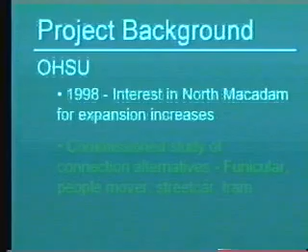They looked at a whole range of things, including funicular rail and people mover. Funicular rail, some of you may have seen in Pittsburgh, going up Mount Washington. It's essentially a rail that goes up an incline, different than a regular rail, but it keeps the rail car level as it goes up the incline and back down. We have one in Pittsburgh; it's the most common one people talk about, but it's essentially a rail that goes up a fairly steep incline. So rather than a streetcar running parallel to grade, this runs essentially level while going up an incline, like so.

People mover systems, there's a lot of different examples of those. If you think about those, it's like if you're at an airport, Atlanta Airport or some of these other ones, they're the things that look like subway cars, essentially. They look a lot like a subway. A lot of times they're cable-driven, a lot different than just a rail.

Streetcar was actually one of the options. It included, in the early stages, thinking about linking the streetcar not down to North Macadam, as we're currently thinking, but actually up to Marquam Hill, to OHSU, instead of back down that way.

And then the tram was one of the projects that was looked at, and their recommendation coming out of that was that the aerial tram was the connection that provided the best reliability and served their needs the best in terms of linking those two areas.

Growing out of that, they also began to think about how they wanted to develop on Marquam Hill, and how OHSU and the other institutions up there would develop on this very difficult piece of property. It's not the place that you would today start a medical institution of the type that we see up there, but that's where they are.

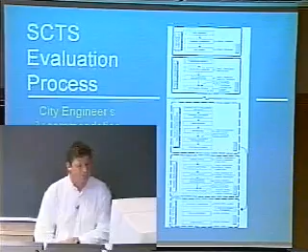Just to give a quick idea of the process, we put together a 5-stage process: first, process development; second, the alternatives analysis, which was that 2-month process we went through. Following that, additional steps including, if needed, evaluating any policy or regulatory conditions, then further design development - once we've decided how we're going to connect, what does that look like and how does it fit within the context of the community - and finally on to PE, preliminary engineering, final engineering, and construction. This process was intended to get the city engineer making a recommendation at these steps all along the way to city council.

We worked with Planning Commission in the early stages of this process, and the process included advice we got from the community, with Planning Commission responding to that advice. So the process was essentially something we took to city council that they approved.

What I'm going to walk you through today is primarily that second step of the process, looking at the various ways you could connect Marquam Hill to North Macadam. The ultimate action coming out of that went to City Council, and they have the ability to either approve, reject, or modify our recommendation in any way. That included a public hearing and a few public open houses along the way.

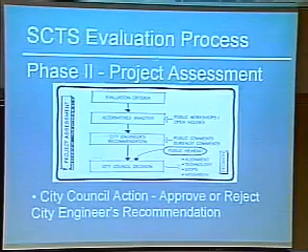A few assumptions we built into the study are pretty key. It's a little bit telling about the process that we had to highlight these assumptions, because I don't know that there had been a lot of community buy-in to these, but we had to make some assumptions heading in. First, that an OHSU presence in North Macadam is desired and appropriate - I don't necessarily think the community had fully embraced that idea yet when we started this process. Second, that their stated travel time needs of 10 to 15 minutes total trip - that's not just in vehicle, but walking out of my office into the next office on the other campus - that 10 to 15 minutes is acceptable, and anything beyond that is pretty much non-acceptable.

Another assumption is that all these systems would operate basically 18 hours a day, 7 days a week, and that the costs we used for comparative purposes - we had to pick a baseline, and we chose to use TriMet costs as that baseline, assuming this is like a public transit facility operated with public transit unions and those kinds of costs. It was all relative, not absolute - we were trying to just compare across these alternatives what the costs were, but that was an important assumption, one that was challenged pretty heartily as we went along.

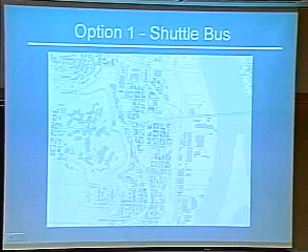I'll run you through the 6 options we discussed. The first option was a shuttle bus option. To orient you, the OHSU campus is here on the left, Terwilliger Parkway runs along through here, Sam Jackson Park Road up in here, and here's I-5. There were 4 different routes that we analyzed in this area.

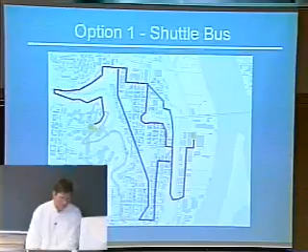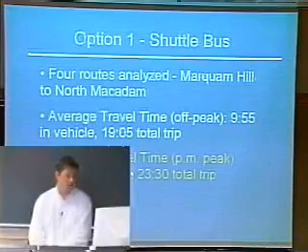We did travel times on each route, and what we found was that the average travel time in off-peak hours was around 10 minutes in the vehicle and about 20 minutes total trip. But it was susceptible to traffic, so during peak hours that time went up — on average 14 minutes in the vehicle, about 23 minutes total trip. So you can go back to those assumptions of 10 to 15 minutes.

This wasn't working really as a reliable thing. I actually did my own test times one night — they weren't included here. I had one trip from Marquam Hill down to North Macadam that took 40 minutes because there was congestion, something on the Ross Island Bridge. That kind of unreliability is really a problem.

So if any of the shuttle bus options included things like striping lanes for bus only or building a new bridge across I-5, issues like that to streamline the travel time?

It did — there were some capacity improvements that were considered, though we couldn't run those since they didn't exist. There are some improvements considered along there, for instance at 6th and Caruthers, adding another lane that we thought would be important. But the basic bottleneck is the Ross Island Bridge ramps and everything associated with that. To get around that you'd have to do something like an overcrossing, and that wasn't considered.

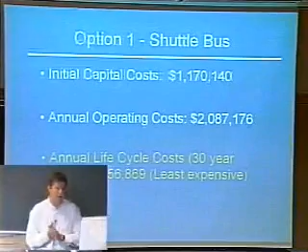We then compared a lot of the costs — I won't get into these too much. There were initial capital costs with buying the buses and operating costs. One of the things we did was try to anticipate a 30-year life cycle cost, which we thought was very important for a cost comparison taking both capital and operating costs into consideration. That became the basis for cost comparison throughout.

With a shuttle bus you have not only the operating costs of having 6 or 7 drivers on call for 18 hours a day, 7 days a week, but you're also continuing to buy new vehicles over time and maintaining those vehicles. All those things were factored into our life cycle costs.

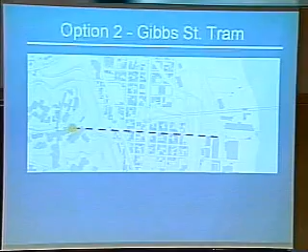At this point we start getting into the aerial alternatives, the remaining five options. Option 2, the Gibbs Street Tram, was the one originally proposed by OHSU. This is what we call a bi-cable aerial tram — I'll get into that in a second. It runs along the Gibbs Street alignment, just to the west of Barbur Boulevard, all the way down into North Macadam, on an existing city right-of-way. It goes over the Lair Hill neighborhood.

This is a historic district, the South Portland Historic District. A lot of you may have been down in here — a lot of older single-family homes in this district. You can tell by the map that it's been chewed up for years by transportation improvements. It's really been divorced in all directions from the rest of the city, so it's this real enclave down here.

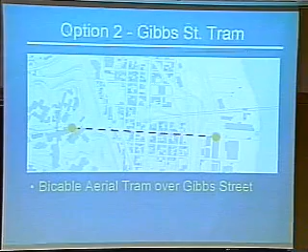So the Gibbs Street Tram essentially flies straight over that alignment. There would be one tower to the east of I-5 and Macadam Avenue in North Macadam. It would be about 185 feet tall.

Let me briefly describe. We looked at three different aerial systems. I'll describe the bi-cable tram here, shown in Germany. The bi-cable tram, essentially, you think about it almost as a railway in the air.

The two main cables that you see there are stationary cables, strung at very high tension between the upper terminal and the lower terminal. Because of that high tension, they can span very large distances, which is different than the gondola that I'll show you later.

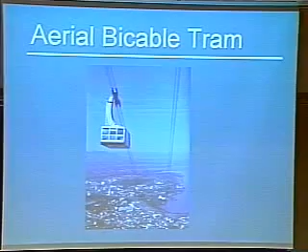Then there's a third cable that actually hauls the tram back and forth. There are two of these, running in reversible fashion past each other - as one is going up, the other's going down, and then they reverse. So they're very simple systems, really.

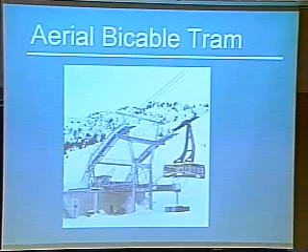It's an example of a lower platform. Because of the high tension, these systems can carry high loads - in some cases 150 passengers, with very large cars. In this case, we're recommending essentially an 80-person car, which we'd expect to be loaded to about 60 at capacity, but it's designed for an 80-person capacity.

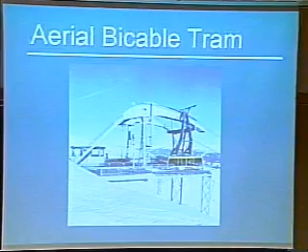Structurally, this is probably what would happen up at the OHSU campus, where instead of having a separate tower, the tram would essentially integrate into the upper landing. The tower and the landing platform would become one structure at the top.

And this is at Stone Mountain, Georgia, just showing a different type of treatment. We looked at a number of different things in the neighborhood.

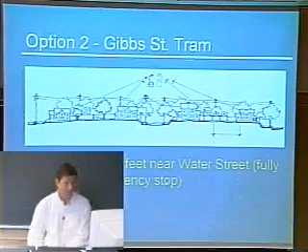At a low point, the tram gets about 67 feet off the ground - that's at an emergency stop. Typically it's flying about 15 feet higher than that over the neighborhood, but at an emergency stop, driven down to the ground, that's its low point.

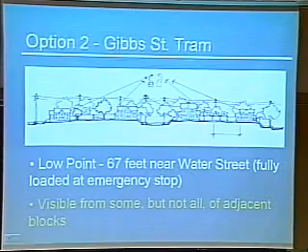What we tried to demonstrate was that the system will be visible from some, but not all, of the blocks. There are a number of different things to consider there - is it visible from the interior of the block, from the house, or where exactly is it visible from? We looked at a lot of that in the report itself.

The key here, where the tram becomes really reliable, is in its travel time - it's 2.8 minutes from point to point. So it becomes very fast and very reliable, and when you add the walking time to and from, you get about a 12.5-minute total trip.

Initial capital costs are just over $10 million, with operating costs slightly higher than that of the shuttle bus system. Over the life cycle, capitalizing that, you get about $2.6 million cost per year.

This is where we got into some of the other options, though. We also looked at something that included connections into the neighborhood. One of the problems with the Gibbs Street tram is that it flies right over the neighborhood, and one of their arguments against it has always been, what's in it for us?

This thing's going by our street, but we can't get on it - there's nothing here that's of benefit to us. It's a valid argument. So one of the options we looked at considered a second tram down to Barbur Boulevard. That did a couple things: one, it provided access into the neighborhood that folks could walk to and use.

Second, Barbur Boulevard is a very important transit corridor in southwest Portland, and the ability to essentially feed Marquam Hill with the transit resources along Barbur Boulevard was pretty critical.

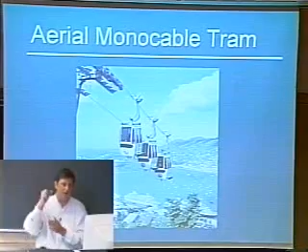Think about a chairlift - it's like a chairlift at a ski area where the chair is attached to the cable. The one difference here is that, like the bi-cable tram, it would run back and forth. It would be reversible, so the cars wouldn't go around the bull wheel at the bottom - they would stop and go back up the other way. So you'd have these two sets of two cars each running back and forth against each other.

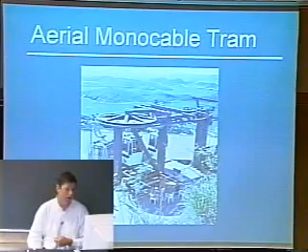Where does that take place? That's in St. Thomas, Virgin Islands, and this is the same one right here. One of the advantages for this system is that it has a very tight footprint up here for where the system lands, so it doesn't require a lot of land to implement. And this is down at the bottom here again - so a very tight footprint, relatively speaking.

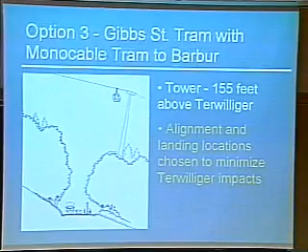When you look at that section, you have an additional tower into Terwilliger Parkway, and that's something that needs to be considered. It's about 155 feet above Terwilliger - this is a section through Terwilliger Parkway looking at that. The alignment was chosen to get up and over Terwilliger without clear-cutting the swath up through there like you'd see for a transmission line. So it would get up and over the parkway fairly quickly.

The Gibbs Street tram still remains, as we talked about before. This monocable tram would have about a 1.5-minute trip between Barbur and the top. When you include that into the total capital cost with the Gibbs Street tram, you're adding about $5 million onto the cost. The annual operating costs go up to $2.8 million, but the life cycle costs go down.

And I think that's really important - I need to explain why that is. They go down from what we had shown before, primarily because if you redesign the regional transit system around that Barbur stop, you're actually able to - we had it calculated for us - they could save about $750,000 a year in servicing Marquam Hill by reorienting their service to that stop.

So instead of running all their express service to Marquam Hill, they could feed that lower stop, saving a lot of time and operating expense in doing so.

Question: in your capital cost, does that include some kind of a pedestrian bridge over Barbur Boulevard to help the neighborhood residents reach that stop? No. One of the things it did include was improvements to Barbur that would improve the crossing.

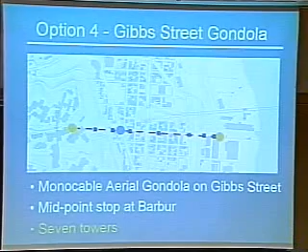Unlike the tram, there would be probably a minimum of 7 towers along the alignment to support the system, and I'll explain why as we look at this. This is a gondola system—you see many more cars, constantly circulating on this rope. This is in Barcelona, and this is at Vail. What you can see if you look up at what's happening here is a whole variety of wheels, and you notice it's suspended by one cable and hauled by that one cable.

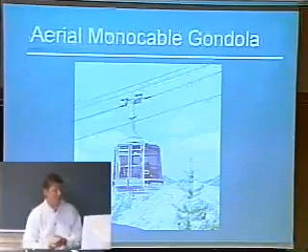I believe this is an 8-person car, so the cars themselves are much smaller than the tram, and you have these incredibly long distances. You need about 100 feet at each station to slow down, get into the station, and have the gondola ready to load and unload. Those wheels on top come through this system—the car is released from the cable, and these wheels carry it through the station, slow it down, and it continues to move slowly through the station as it's loaded and unloaded, before being accelerated, reattached to the rope, and sent on its way in the other direction.

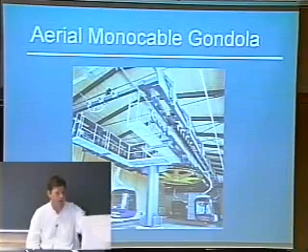So the systems are much more complex mechanically than the tram systems. It would also be impossible to have an attendant on each of these cars—you have so many cars on this system. The tram has one attendant per car, but the gondola cars are most likely unattended. And you have a bull wheel—this is just another view of the mechanical system required at these endpoints on the gondola.

This would be something like what the upper terminal would look like up at OHSU if a gondola system were used. There's a lot of different ways that those systems have been designed and detailed out.

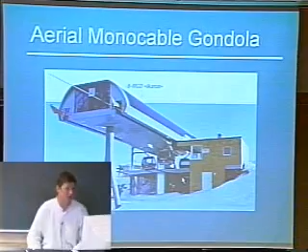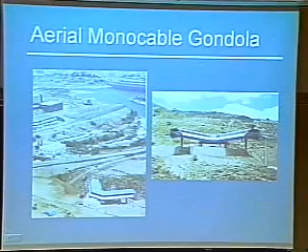The other interesting thing about gondolas, which we explored in another option, is that they're flexible in their alignment. The tram really has to be a straight line—it cannot vary in its alignment, since you're just stringing these with tension. But the gondola, because you're able to remove the car from the rope, detach it, and get it onto another rope through that system, you're able to do these turn points. This is in the Middle East—I'm not entirely sure of the exact location, but it's an example where they've made a very tight turn with the system. So this would potentially allow us to get into other areas of the neighborhood where there was perhaps less of an impact.

With exponentially more cars and more people getting on and off those vehicles, would you not also run the risk of stopping and starting that system much more, because there are more people involved at various points along that system?

I think the reliability of the system is a lot less certain than that of the tram, and it's one of the reasons we felt pretty uncomfortable recommending it as a system. It takes a heck of a lot of upkeep, and the chances for breakdown are much greater with the gondola system.

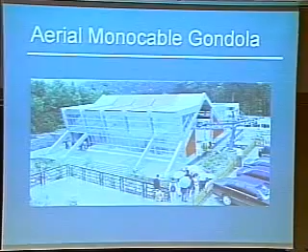It's just another example of a bottom terminal. When you look at it in the neighborhood itself, whereas in our cross section you sort of saw these two little cars floating over the neighborhood along with some cables, the difference here with the gondola is that you also need to draw the tower in, and there's these towers at points along the alignment in the neighborhood itself.

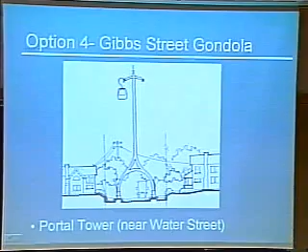And they're going along a public street, so in some way you also have to make accommodations for how that street remains open, if it does remain open. This is just one idea where we do what's called a portal tower, where it basically bridges the street itself before supporting the gondola up at the top.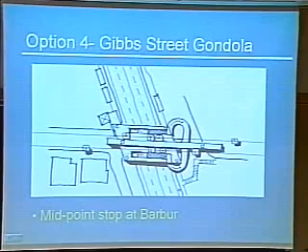So you have the loading and unloading platforms that need to be accommodated. I had the hardest time drawing this because there are multiple levels involved. But the best way to describe this is in section, where you're going to get people up, meet ADA, and get them up to that level for loading and unloading on that structure. At a minimum, you have to build some sort of overpass structure that will also house the mechanical equipment and loading and unloading platforms over Barbur Boulevard.

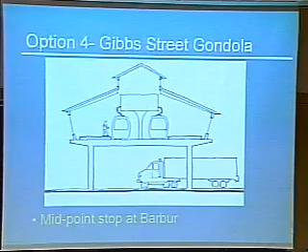So it gets to be a little expensive just to accommodate that. The average travel time was about 7 minutes, 14 and a half minutes total trip, so again it's just sort of under the wire on the stated travel time needs. It's a little more expensive on initial capital cost, and about 50% more expensive on operating costs, which gets into the complex mechanical system. That's really a big operating cost issue, so for life cycle cost it's another 50% higher than some of the other options we looked at.

Two more real quick, we looked at a couple of these last two options, looking at whether we could potentially avoid the heart of the neighborhood, essentially, and whether we could look at some other options for where these might be aligned.

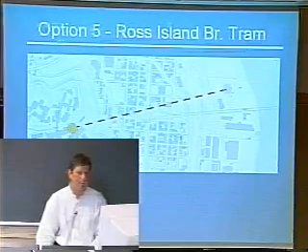So one of the things we wanted to look at was, well, there's all this dead space now, wouldn't that be a logical place to put this overhead system where it's not flying down a neighborhood street? That's where we looked at, again, the two different types of technology. One is looking at the tram and getting it down where it would land to the north of the Ross Island Bridge in North Macadam.

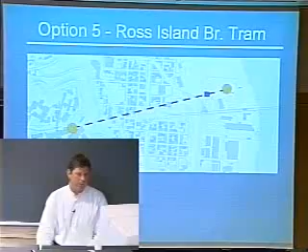In this case, again, you'd have one tower just to the east of I-5, and the travel time still makes a lot of sense.

The capital costs go up quite a bit because you're acquiring property along the way. It's not spending its time neatly down the middle of an existing right-of-way, but you're now flying over property that probably needs to be acquired as you do that. The operating costs are pretty similar. The life cycle costs go up a little bit just because of the higher initial capital costs.

This sixth option, the last one we looked at, had the most promise from an urban design standpoint, but also had some flaws. That was to use the flexibility of the gondola system to bend this around, taking advantage of the dead space in the middle of the neighborhood to align the gondola in that area before bringing it back down into North Macadam, either in this location or potentially north of the Ross Island Bridge. It could turn either way.

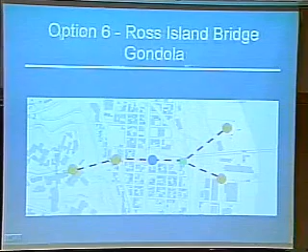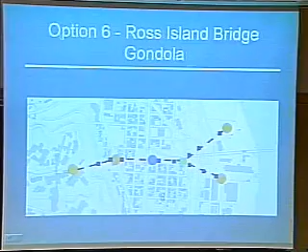You also had the opportunity not just to have the stop at Barbur in this case, but also potentially integrate another stop internal to the neighborhood. That was something a lot of folks in the neighborhood felt was worth looking at. Again, there's a number of towers in the neighborhood associated with the gondola. The crossing over Barbur is very similar to the other one, it just also happens to incorporate a turn.

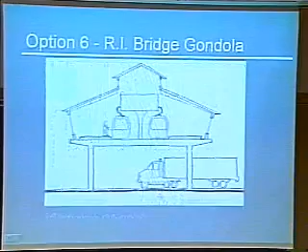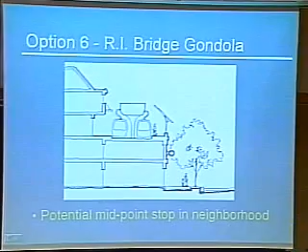So the cross-section remains pretty much the same. The potential for the stop internal to the neighborhood is in those blocks that we would reconnect and open up for redevelopment. You also had the opportunity to integrate the gondola system into the development in that neighborhood. This is just a quick suggestion that it could even be part of development in that area.

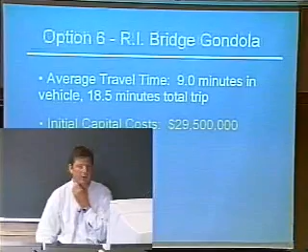Part of the downside to continuing to speed up and slow down and reattach and detach with the gondola is that the trip begins to get longer and longer. In that case, you have about a 9-minute trip in the vehicle, 18.5-minute total trip. The capital costs for this are pretty expensive given all the structures and the higher cost of the gondola system itself. When you look at the operating and life cycle costs, this is really the most expensive of the options, given the even more complexity added to the system.

So in the end, I just want to touch on some of the evaluation factors that we looked at. These were things that we went through with the Planning Commission ahead of time, with the City Council as well. They're broken down into a number of subcategories under each one, but I won't get into that.

There's the neighborhood impacts category, things like views to and from the system, noise, the kind of impact on parking, property values, things like that. We looked at a whole range of issues underneath the neighborhood impact category.

Transportation access and efficiency looked at how well this system integrates with the surrounding transportation system. That's where things like looking at Barbur Boulevard became incredibly important in terms of our evaluation.

Feasibility of the study: we showed some of these alternatives that landed, for instance, north of the Ross Island Bridge. Well, these are landing on essentially an active barge operation, versus the ones landing south of the Ross Island Bridge, which were landing near a property that OHSU already had an option on and was ready to basically redevelop. So in terms of feasibility and development timing, the ones north of the Ross Island Bridge aren't really very viable options for us, say, over the next 10 years or so.

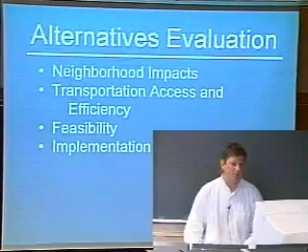Costs, which we ran through, were obviously a consideration. Maintenance and operations considerations are sort of part of that. In public safety, there are a lot of differences between these different systems, like the attendance on the cabins, for example. If these are public systems, how safe or secure is one system versus another. There are also subtle differences in their operations in wind, and what happens if there's a fire under the alignment, and things like that. Those are all things we considered.

Yeah. What about ridership estimates?

We looked at ridership estimates as well. Those had already been performed prior to us coming in, so we'd gotten a jump on some of those. The ridership for the aerial systems was essentially thought to be equal, at least for the ones that landed south of the Ross Island Bridge. We also had ridership estimates for the shuttle bus, which greatly decreased. Let's come back to that in a second, I can give some more detail on that.

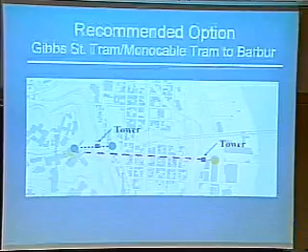So what we ended up recommending was a Gibbs Street tram with a second tram down to Barbur. That was recommended for a number of different reasons. One was that we felt the gondola system, as a mechanical system itself, was untenable, and that it had additional impacts in the neighborhood that we felt were fairly unacceptable. The number of towers, the structures over Barbur, seemed to have more of a negative impact.

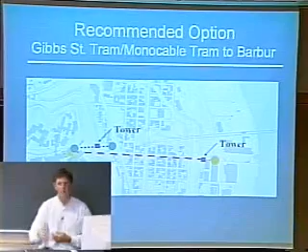This also really met the travel time needs that were stated, the best of all the systems. The tram system, in and of itself, is a very reliable transportation system. When you can look at being able to get to that platform knowing that a tram is going to show up no more than a minute and a half from now, and that I can be down at the bottom another three minutes later, that's very important.

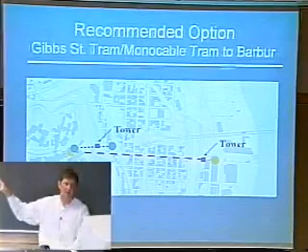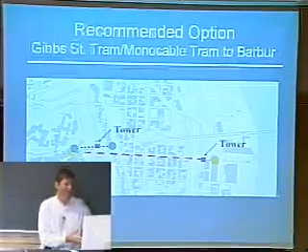You can question the wisdom of the cities putting these two buildings at opposite ends of 4th Avenue. But as I travel from the Portland building, for instance, down to meetings at the 1900 building, I have to account for that travel time. If I had to also account for when's the bus going to show up, do I have to worry about traffic congestion, and it's at 4:30, I may have to account for a half an hour, or I may have to account for an hour, I'm not sure. It becomes very difficult for people to do that.

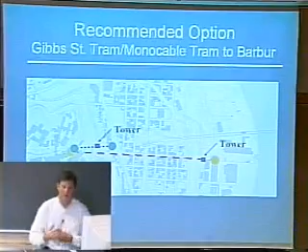Now you're asking researchers, professors, doctors at OHSU to account for that time in their schedule. That's one of the reasons we felt accounting for travel time was very important.

This is probably considered a little bit of a sick question, but what about the possibility of it being a target for somebody? It came up, that's one of the things we wanted to look at. For the most part, you can't say that any structure is not susceptible to that. Certainly they would be. Our engineer felt that really the targets you have here are the towers themselves and perhaps the stations.

It's always a possibility. In other tram systems around the United States, has there been any history of anything? There was one in Italy four or five years ago where an American combat plane hit a gondola system. That was one example. That was one of those things where they claimed it was unmapped, and there's a lot of things that went on with that. There have been some incidents. The gondola is another system that hasn't—there was a fire on one of them recently that caused problems.

So there are some safety issues with that, but the feeling was that you could design around these. For instance, the tower to the east of Macadam, that street is not going to be open to traffic, and just because the tower is taking up so much room, you can design other things into it that would, say, not allow someone to drive a truck into it—just thinking of worst case scenarios, someone's got a truck full of fertilizer and wants to drive into it—and you can prevent those things from happening through design.

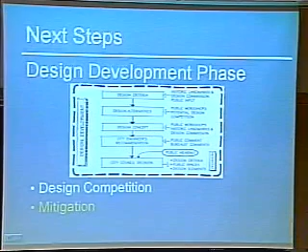So the design competition is a process. Looking at mitigation of the system is a process, and figuring out how to pay for it. That's all going to be coming up in the next piece. I said I'd go through some of the things we learned, or maybe that we could do better, so we'll do that and wrap up.

I think from the get-go, when I was describing the background of this, you notice that it started with OHSU. And I think what's happened from the beginning on this is that from day one, there's been polarization on this. OHSU has stated what they want, the neighborhood stated what they want or don't want, and there's been no middle ground.

And this polarization takes form in many different ways. You have these citywide goals, economic development goals, versus the neighborhood goals, and which one takes priority. You have this new technology versus the neighborhood and historic preservation, and again, which one is going to take priority. You've got, on one side, just as simple as yes versus no, and no one is thinking about how you take advantage of the discussion to make it work for everyone. So that's sort of where we stepped in, that was the environment we stepped into, and frankly it hasn't moved much off of that since we started.

Part of it is, we had 2 months to complete our study. That does not give you time to sit down and mediate and listen and think about how you can come out of this with a win-win. Like I said, I think what it gave us was an opportunity to make sure that our city council is making an informed decision. That's really what this amounted to.